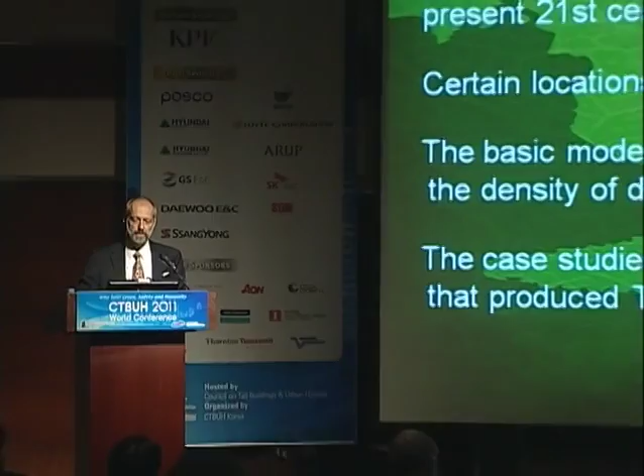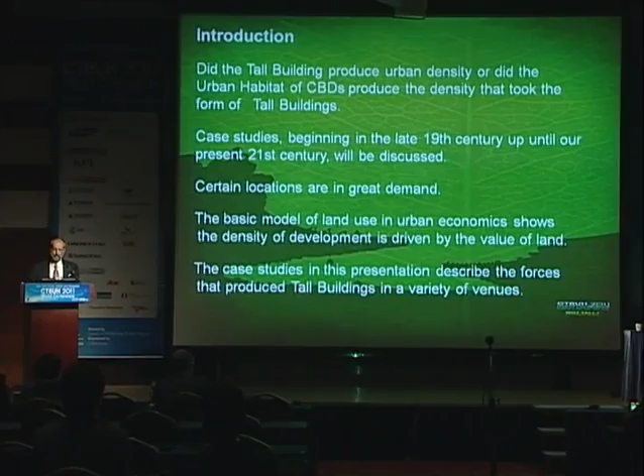So our introduction: did the tall building produce urban density, or did the urban habitat of central business districts produce the density that took the form of tall buildings? Case studies beginning in the late 19th century up until our present 21st century will be discussed. Certain locations are in great demand. The basic model of land use in urban economics shows the density of development is driven by the value of the land. The case studies in this presentation describe the forces that produce tall buildings in a variety of venues.

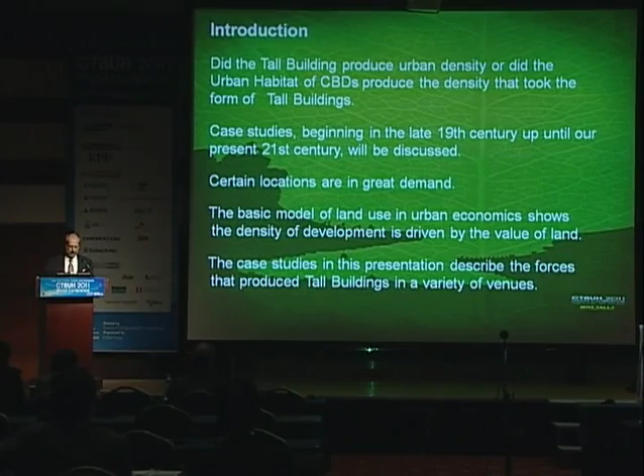In 19th century London, the tallest buildings were Big Ben and St. Paul's. Both are symbolic landmarks because they are government and religious buildings. In 1865, the Midland Railway constructed a terminal in a northwest working class neighborhood, not downtown London, but an outlying neighborhood. They created a competition for a 150-room hotel to be an anchor to their St. Pancras terminal. The winner of the competition was George Gilbert Scott, who designed a 300-room hotel.

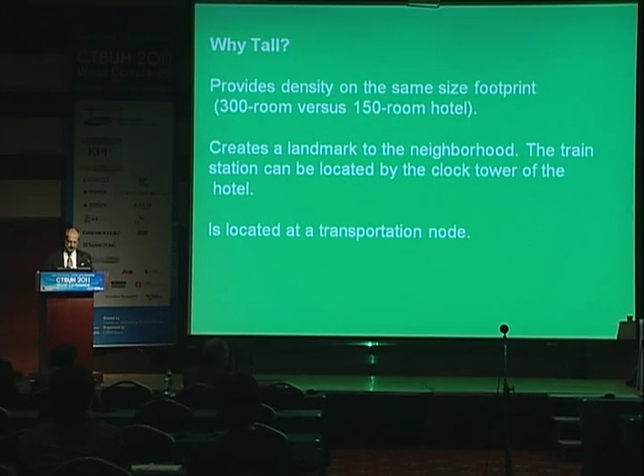So why tall? It provides density on the same size footprint, a 300-room versus a 150-room hotel. It creates a landmark to the neighborhood. The train station can be located by the clock tower of the hotel and is located at a transportation node now known as the St. Pancras International Terminal for the Eurostar trains.

It is a steel frame building, the first to use metal portals to resist lateral wind loads. Before this time, buildings had traditionally resisted wind loads with their masonry walls. This is the first example of metal portals designed into a building to resist lateral wind loads.

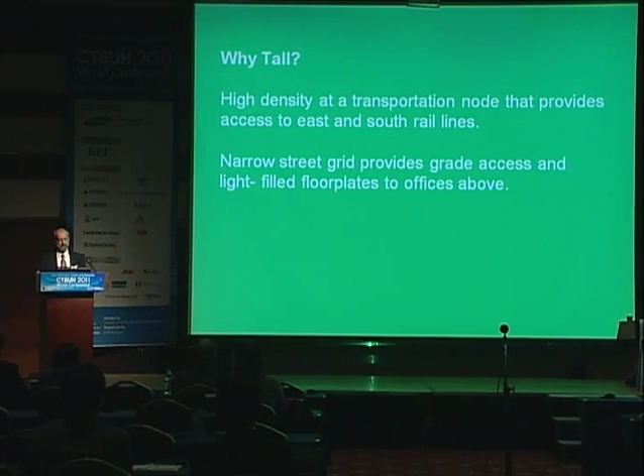So why tall? It creates high density at a transportation node that provides access east to New York City and south to New Orleans rail lines. The narrow street grid provides access and light-filled floor plates to the offices above.

The top level is the pedestrian entrance, and the lower level is for deliveries and parking. Because it is located near the commuter train stations, it has become a premier address for commercial offices. As a result, it has become very dense.

The lower levels have large floor plates for large offices. The mid-levels have varying size floor plates for medium-sized companies. And the upper levels have shallow floor plates with exceptional views for executive suites. Within one building are spaces for large offices, medium-sized offices, and executive suites.

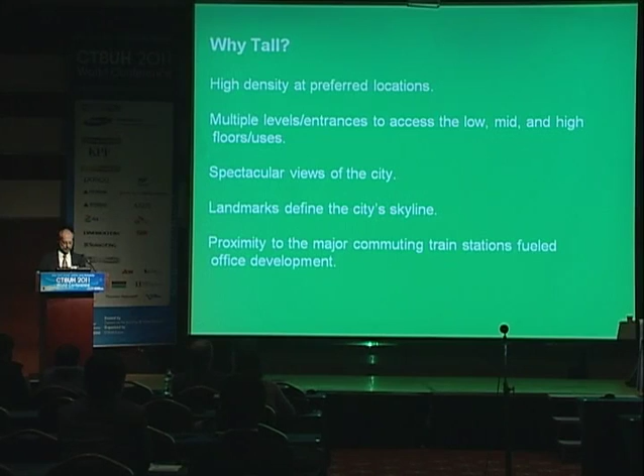So why tall in Chicago? High density at preferred locations. Multiple levels and entrances to access the low, mid, and high floors and uses. Spectacular views of the city. Landmarks define the city's skyline. Proximity to the major commuting train stations fueled office development.

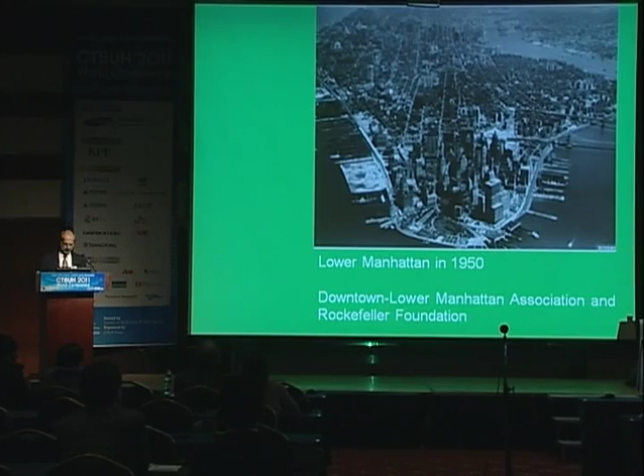Because of its commercial activity, it became one of the densest places on Earth. By 1930, its tallest tower was the Bank of Manhattan, designed by H. Craig Severance. It is now called the Trump Building.

This is an excellent site for a tall building because the New Jersey trains terminate on the lower level, and a subway station connection is on the east side of the site. This is an excellent site for a tall building.

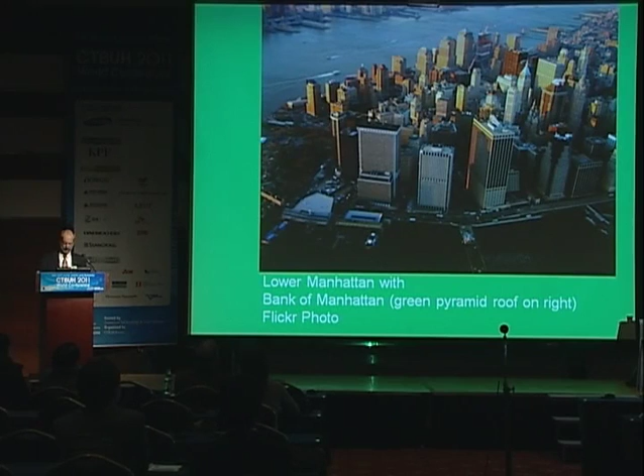Because Chrysler was a manufacturer of automobiles and not connected with the businesses of Lower Manhattan, he marketed to Midtown office tenants. As a result, this building stands out in its neighborhood and has become a landmark to the New York skyline.

Penn Station is a few blocks to the west, with Grand Central a few blocks east. It is also located near subway lines. Standing by itself, it has commanding views of the city.

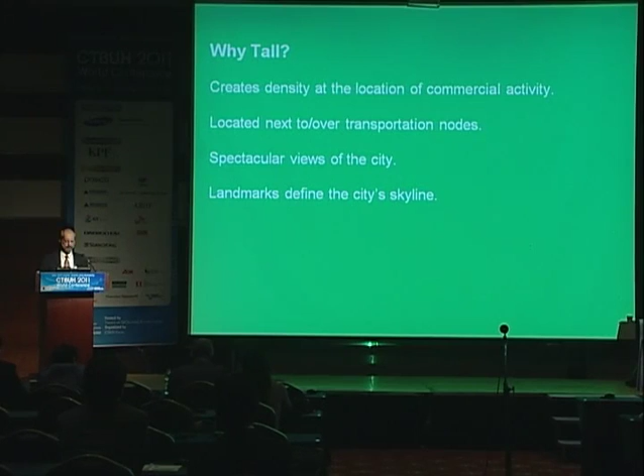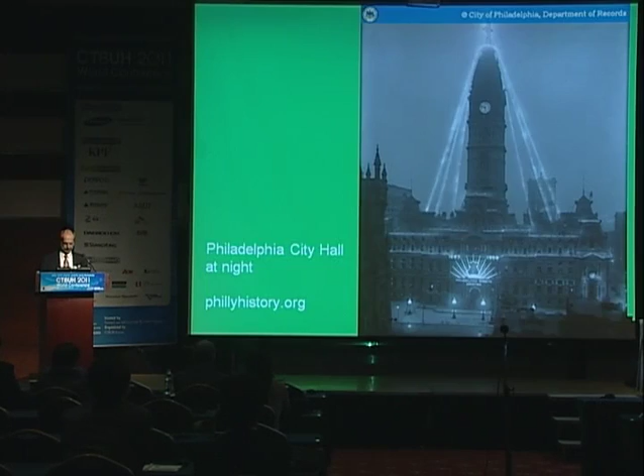So why tall? It creates density at a desirable transportation node. Density creates a synergy of functions for a city within a city - that's particularly true of Cleveland. It provides spectacular views of the city, and a landmark defines the city's skyline. It unifies several branches of government within one building and is a symbolic center of civic life - that's especially true of Philadelphia.

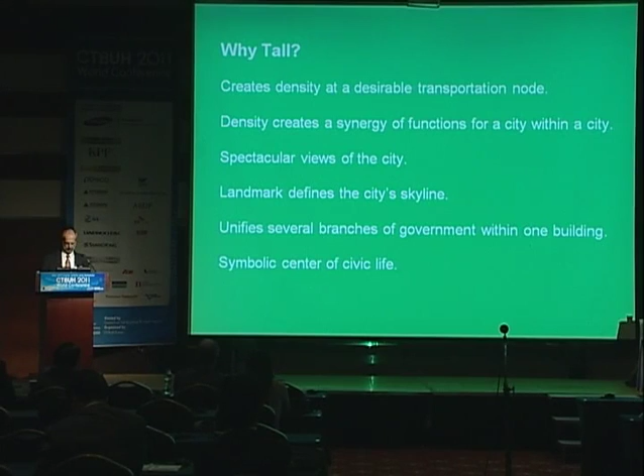So why tall in the case of Hong Kong? Symbolic lighthouse landmarks define the harbor. It creates density at locations of commercial activity, with spectacular views of the city and harbor. It's located over transportation nodes, and density creates a synergy of 24/7 multi-use functions for a city within a city.

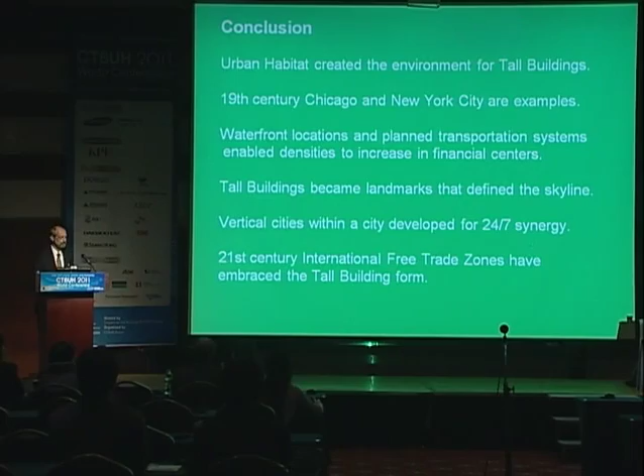Thanks very much, Robert, for this very interesting overview on how tall buildings developed in various cities around the world. I think a particularly interesting aspect is that you highlighted that the buildings are much more than just icons, and integration of the tall buildings in our cities is something really important for us to consider. Let's move on.